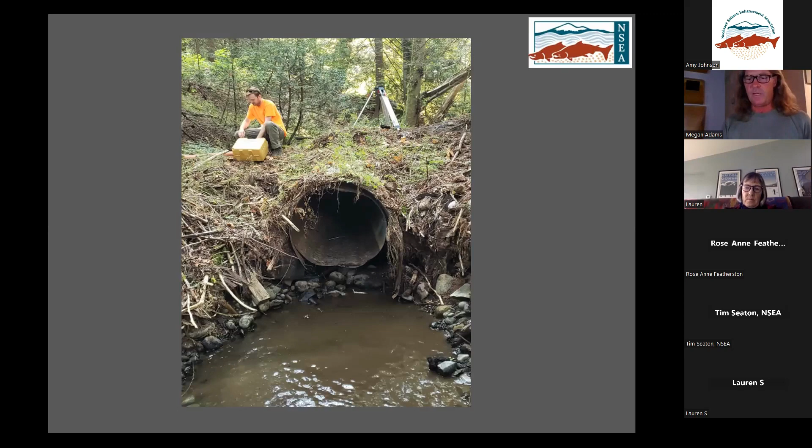There's other reasons; you might not have an outfall drop. You may have a culvert that's generally just too steep. The water moves too quickly for fish to migrate. But this is probably a very typical scenario. So I thought I would start with that before I get into what changed in 2003. So I should back it up.

It happened before 2003. So prior to 2003, the county kept a list of primarily culverts that they needed to maintain, not really inventorying them as to whether they were fish passage barriers or not. Department of Transportation, state highways, they were keeping their own inventory. Maybe the city of Bellingham had a list, but there wasn't really one conclusive list, and not everybody was measuring things the same way. So in 2003, the county applied for funding to do an inventory of all of Whatcom County, or Water Resource Inventory Area 1.

And we partnered with the county and the Nooksack tribe, and we were tasked with inventorying all barriers on private property, where we were allowed access. So as I just mentioned, everybody's got culverts, not all of them are barriers, but at that point in time, really nobody knew which culvert was a barrier and who owned it.

So Whatcom County arranged with the Department of Fish and Wildlife to come up and teach us a protocol, which is kind of the universal protocol they use. That's a level A survey. And what you do is essentially, just like in that past picture, you're going to take elevations of that pool drop, or you're going to take elevations of the slope of a culvert. You're going to look at the upstream habitat and the downstream habitat that's available for fish if they were to get past that barrier. And then you can generate this priority index number, and I'll get into that a little bit more. And that's what allows you to kind of look at apples to apples.

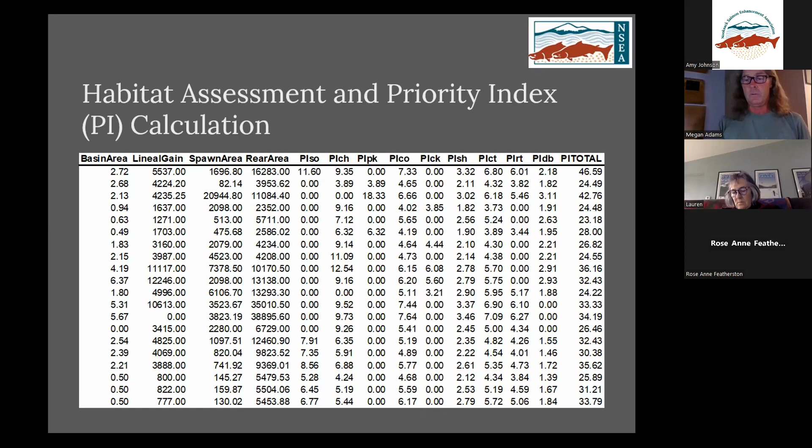What that allows you to do is, if the barrier was in Eastern Washington or if it was in Forks, you would have a number that would rank that against all other barriers. So it gives you a great way to prioritize what projects you should tackle first.

But this was my most favorite thing, and probably my first introduction to GIS. All of the data we collected was spatially recognized, so it knows where you are when you're doing this survey. And so it was all plotted on a map. And so in this case, you could see all of the culverts and you could see all of the barriers in a creek. And then you could say, okay, well, if we address this one and then the county addresses that road and the DOT addresses the highway, you could eliminate all the barriers in an entire watershed. So to me, this was the most powerful tool that came out of that.

And I'm not patting our backs, again, it was the county that did this, but this was kind of the first database of its kind at that time. And since then, there's all kinds of incredible data, specifically SalmonScape, which is managed by the Department of Fish and Wildlife, where you can look at every barrier in the entire state.

So these were the number of crossings that we assessed. And there's a little more than 800 that were barriers, and some of those are complete barriers, like no fish get up them at any time. Other ones were just partial barriers, so maybe in particularly strong winter flows, the culvert has a bit of slope, fish can't migrate through it, or in low summer flows, fish can't migrate downstream through the pipe.

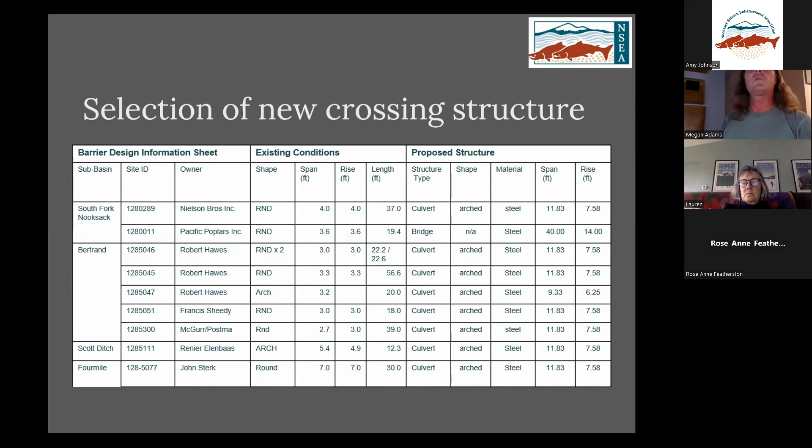And so I think with that funding, we were able to create plans for the top 15 projects that we wanted. And so then again, we went back into a database and we looked at what is the problem, what would be the best appropriate fix. At that point, we were just like, well, culverts are cheaper. We should just replace smaller culverts with bigger culverts. And after some practice, we learned that that's not always the case.

So you've got these designs, you've got this database telling you where the barriers are, and now you've got to go look for money. And very fortunately, there were a couple of programs that came into existence right after this. And one was the Family Forest Fish Passage Program. And that is aimed at forest landowners who have inherited barriers. So if you're a large forest landowner like Sierra Pacific, you have a road maintenance and abandonment plan that you have to have in order to log or remove timber, meaning that you are going to build all your crossings in accordance with WDFW specs. And then when you're done, you're going to pull those crossings and move back out.

But let's say somebody subdivided a piece off of a forest parcel and somebody built a house on it, and then you buy that house, but there's all these abandoned forest roads up in the forest land behind your house. The reason that this was legislated was that you shouldn't be burdened with the removal of that because you never installed those pipes. So if you have forest land, that program is wonderful.

There were a couple other smaller programs, Landowner Incentive Program. It's no longer in existence. U.S. Fish and Wildlife Partners for Fish and Wildlife. That program's also not in existence anymore, but there were programs you could apply to. They're competitive, but it was particularly fruitful if you had this PI number and you had a design, even if it wasn't 100% design, like you were ready to go, you were much more apt to get funding than to just go and say, well, we think we've got a barrier, we need you to give us some money.

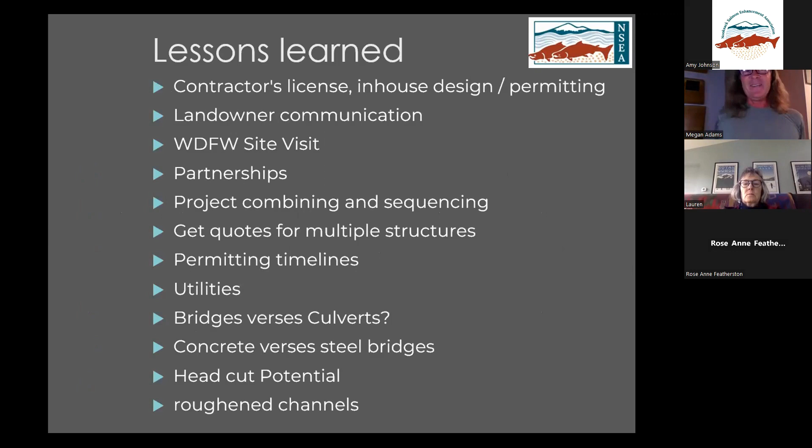Lessons learned. I won't go into all of these because I'm going to cover some of them in future slides. But yeah, you learn some things, especially if you haven't done many in-stream fish passage projects before. And as you learn, you learn shortcuts, or you meet more people that can help you out. You get good relationships with good contractors who are really efficient.

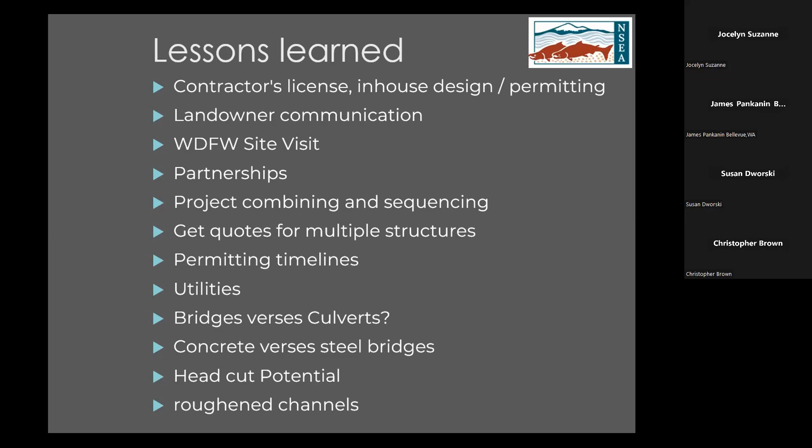But I'll just touch on a few things that we learned. As I mentioned, we had this old total station, and for those of you that don't know, ours is kind of antiquated, but it's a piece of survey equipment which, once you program it, knows where it is in space in 3 dimensions. And then you can just use that to take elevations and points, and then it will know where all those points are. And as I mentioned, then you can take it into a program like AutoCAD and create a site plan and get all of your elevations.

So we figured we already have this and most of us can run it. Why would we pay somebody else to survey it? So we started doing that. We found some students who had taken AutoCAD. I studied AutoCAD for a while. I'm terrible at it. I can do a little bit of quality control in AutoCAD, but I can't draw. So we found people that weren't engineers, but could draft plans. We found a few retired soil engineers who would help us out with foundation designs. We worked with a number of hydraulic engineers in Whatcom County who've helped us.

If you build a crossing that provides access or emergency vehicle access, it has to be fully engineered and has to come up to the fire marshal standards for fire truck crossing and any other vehicle that would cross it. So we can't stamp plans, but we were again working with some very generous engineers who could stamp plans for us, create reports, come back and do an as-built plan, which we need to submit again to the county or the fire marshal when we're completed.

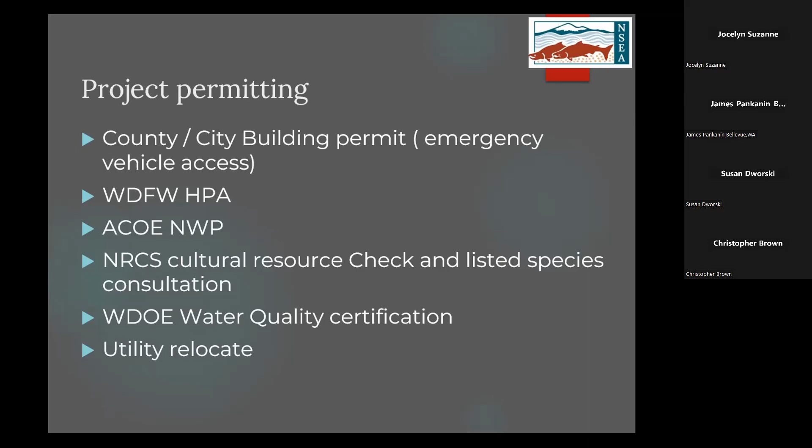So that's not one that we're necessarily worried about, but other things like utility relocates we never really dealt with. We dealt with some private wiring or plumbing over an old farm crossing. But then we came to find out, if you deal with PSE, you're dealing with a sole source contractor, Potelco. If you're not familiar with that, it takes a long time when they come out and move a power line. So there's just little things you learn.

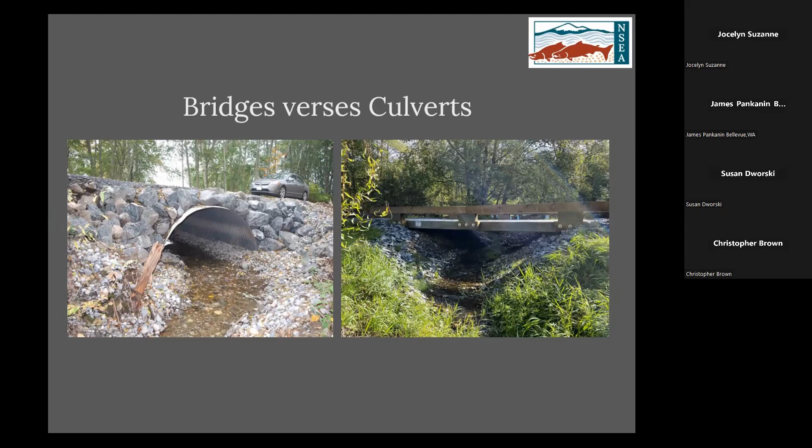I mentioned bridges versus culverts. I had also talked about replacing smaller culverts with bigger culverts and then embedding them into the channel. So the site on the left, that is a 12-foot culvert. It's bedded into the ground 6 feet. And so when you install that culvert, you have to dig a very big hole. The culvert's strength is in its bedding, which means you're going to compress gravel in 8-inch lifts along the side of it, all the way up, to maintain the integrity of that oval. This isn't an oval, this is a circular pipe. Even more so if you have a squashed or oval pipe.

Once you do all that, then you've got to fill the pipe half back in, and with a 12-foot pipe you can run a small skid steer into it. Anything smaller than that, you're kind of doing it by hand. Then, as you also notice, there's a lot of armoring around the edge of the pipe to support the roadway and stop the water from wanting to get around it. If you have utilities in that roadway, you're going to need at least 2 feet of fill. So we found that by the time we installed that 12-foot pipe and all the associated fill and gravel, it was cheaper just to do the bridge.

And the bridge on the right is a 30-foot bridge. I mean, you literally have just removed the culvert, regraded your channel, dug your foundation, and dropped your bridge on top. I mentioned that the reason for embedding that pipe is to allow for changes.

And you can allow for quite a few changes, but you can't really allow for a large tree falling down and fixing itself perpendicular to the pipe, and then a bunch of other stuff piling up behind that, and then the water decides to go around the road completely. So bridges give you a lot more flexibility.

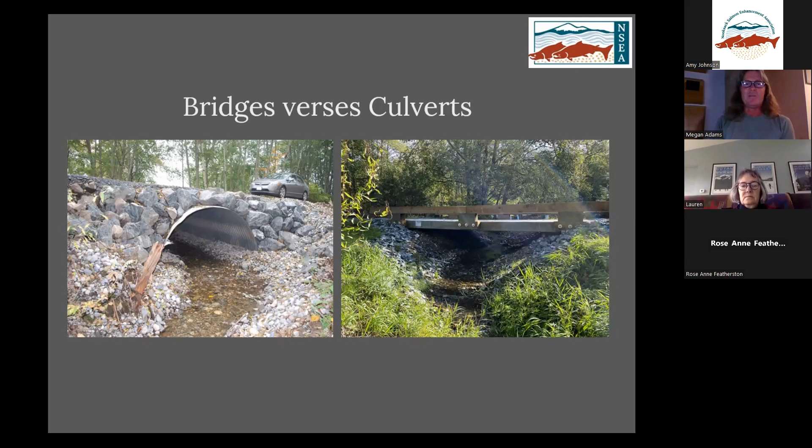When we design our bridge projects, there is a certain amount of clearance so that wood should be able to move. I mean, obviously a huge tree might not get under that bridge, but in that case, in this size of creek, that tree would probably not move. So we kind of came to the realization that bridges were better. Well, they're better for maintenance, and they're cheaper, and they're easier in the long run.

So I mentioned clearance. So one thing that a hydraulic engineer does for us when we hire them to do a project is they look at the basin area above the culvert. They look at the hydrology, so how much rain is going to fall in that basin. And then they can use a model to generate certain storm events, or what you would call a 100-year event. A lot of rain, or rain on snow. What would the water surface elevation be at your cross section under your bridge?

And the Department of Fish and Wildlife, they used to require 1 foot, 2 feet. Now I think they're at 3 feet. The funding agency I mentioned, the Natural Resource Conservation Service, they require a minimum of 2 feet. So you have to run this model and then raise your bridge to make sure you have that clearance. And again, that's allowing large trees or wood to move under the bridge.

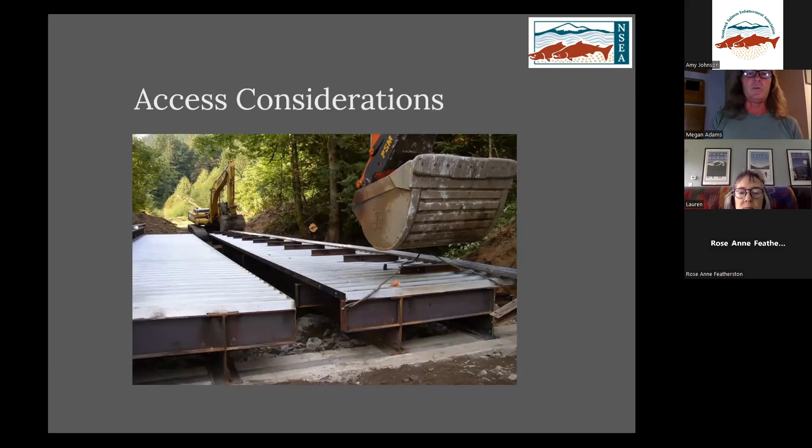I just wanted to give you an example. I was talking a little bit about grade and grade control. One thing we did learn early on, if you were going to do more than one culvert in a reach, and this I think we did 5 over a period of 2 years. If you just adjust for where your crossing is and try and anticipate where the gradient would have been, but you're not really accounting for everything that's upstream, and it'll become apparent when I show you a picture of the plans, is how in that little culvert picture I showed you initially, it's scouring at the bottom.

But at the back, it's aggrading. Gravel is piling up because it cannot get through the pipe. So you would get this kind of step through the prism of the culvert. So if you just adjust for your step, but then you go upstream a little bit, there's another culvert that's doing that or worse, then that has changed the gradient for your culvert. And then you go upstream and it's changed the gradient again. So if you do not take all of that into effect, you might put it in and think, oh, it's all fine, and then it becomes a barrier.

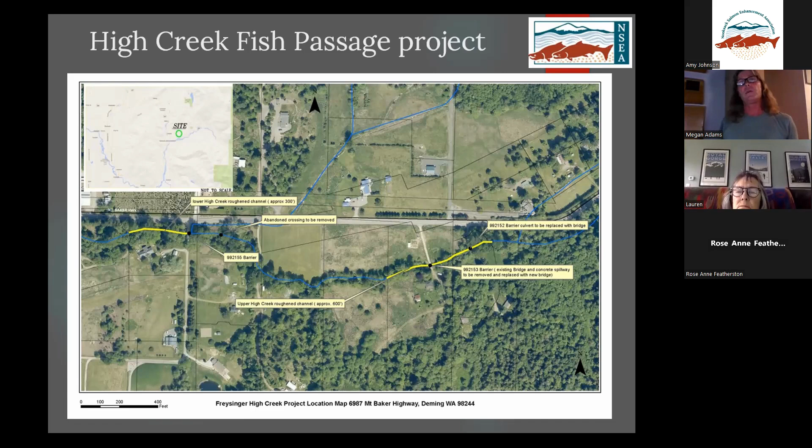So I think I've got a few plan sets in here. So this gets a little more complicated because you want the creek to adjust naturally, but you can't have it adjust all at once. So you end up putting a lot of grade control. You shoot your elevation instead of the 150 feet on either side of the pipe. Maybe you shoot it 2,000 or 3,000 feet through all of the pipes. And then you get to what you think would be an appropriate profile for that creek. It's not perfect, but as close as you can get.

But then while things are adjusting, you have to hold that gradient. So in this, I'm not seeing it so clear with my glasses, but you can see the first barrier, I guess would be to the right. You can see the big drop, and then there's another drop, and then there's another drop. So you're trying to take into account all of those drops.

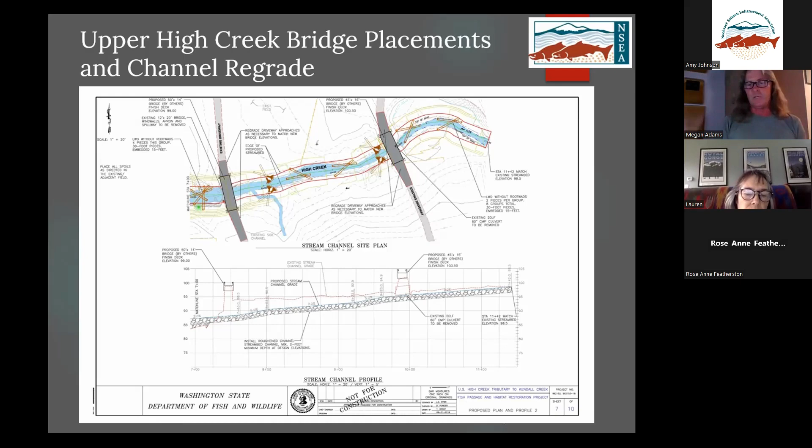So this is a picture of that same site. So this is the second most upstream. There's 5 in a row. This had the biggest drop, probably about an 8-foot drop. So again, to do the one upstream of this, we had to know if you took this drop away, where would the creek end up?

So that's where we're kind of shooting these longer profiles. And in this case, we're using some bigger cobble, we're using some wood, try and slow water down and just let it find its new gradient.

Some things you can't anticipate. So there's a 70-foot bridge we put on Hardscrabble Creek, a tributary to the South Fork. We finished the project in early October. In November, there was a rain on snow event, and they had a debris flow, and that wood all piled up against the bridge in one event. And fortunately, it only pushed the bridge about 6 feet off its foundation.

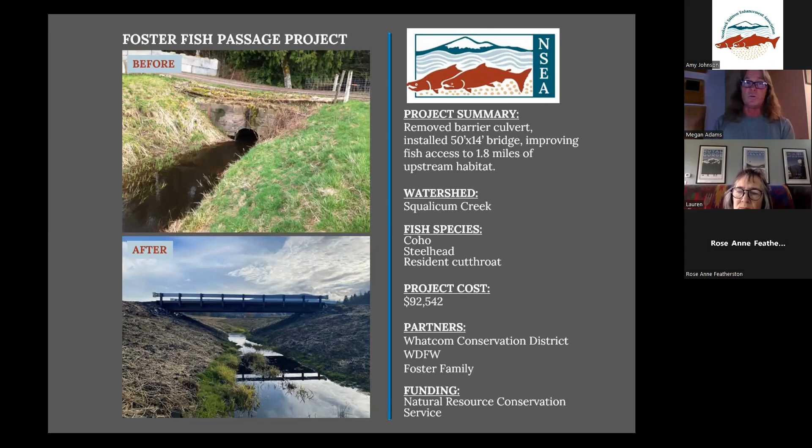Super nice guy. And we said, well, you've got a bunch of failing banks. If we come up and do the bridge, could we put the banks back together and plant the entire 2,250 feet? And he said, sure. It's not the biggest buffer in the world, but it's huge. So we're really excited about that. So yeah, the crew's been planting that all winter.

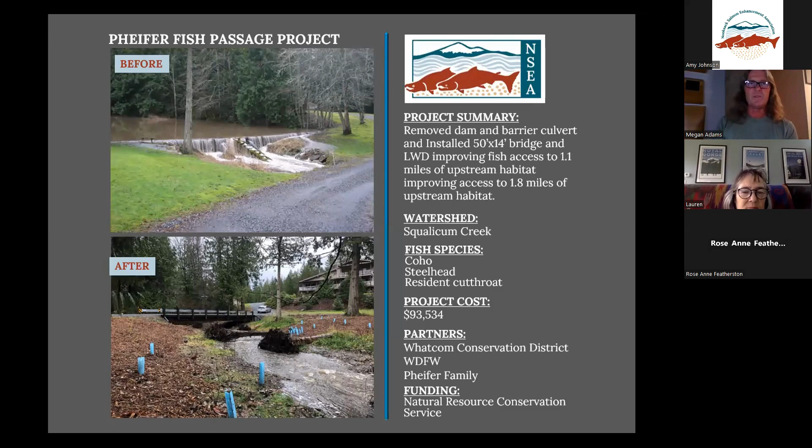We do remove dams, and they're the funnest projects. I think we've only removed about 4. So this was an old concrete dam, was keeping water ponded for agriculture, and just had slowly filled in. Great landowners. They tried to build this little ladder out of extruded aluminum, but it wasn't really working. Yeah, it was a very fun project.

So I mentioned there's still a few out there. So this is on High Creek. I've been talking to this landowner for over 10 years. He's not really interested. He's not mean or anything. He's just not really interested. He likes that little waterfall. But I'm hoping one day. Well, the one that you saw that had the 12-foot drop, I had talked to that person for over 10 years before they let us do it. So you just keep coming back and being persistent.

And the reason I put this slide in here is because they talk about lessons learned. I think persistence is probably the best lesson. Like, don't be deterred. Just keep going back and asking. They'll only say no.

And there is a person at the conservation district named Frank Corey, who was actually a WCC supervisor with us in the mid-late 90s. And he works for the conservation district. He runs that Environmental Quality Incentive Program, and he perseveres. I mean, he helps me find funding for all kinds of stuff I think I would never get funded. You know, he just says, well, we'll just keep trying. So it is just wonderful to have him as a partner. And that is it, I think.

So definitely welcome to ask some questions. And if I went too fast, I could probably even go backwards and find a slide if you had a question about something. Yes. So how much do the bridges cost?

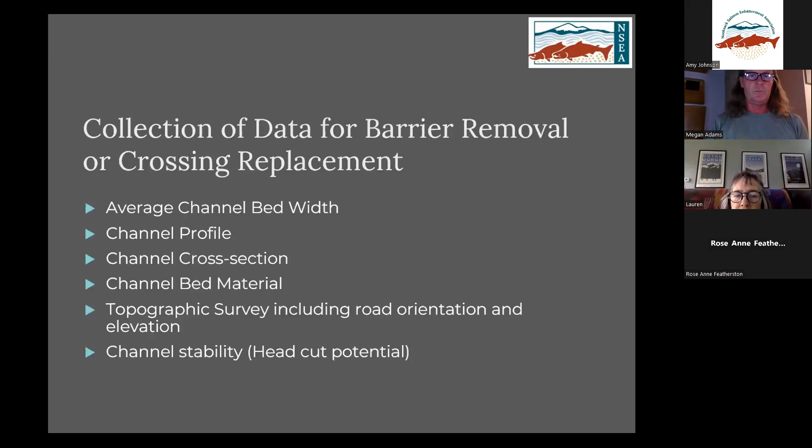So I think they're both 40 feet. And I think this year we go out and we get 3 quotes for each bridge. And I would want to say the concrete's a little less. It's probably about 42,000. The steel one's probably closer to 48,000. Like I say, it's fully engineered. So it's not cheap.

And fortunately, again, there's been some great funding programs. If you have a barrier, there is probably a program that would pay to fix it at no cost to yourself. A little bit of inconvenience, but most of these projects take 3 or 4 days. And if there is a power need, we'll put in generators, keep people's houses, fridges cold, and washer and dryers running.

So I don't know if that gives you an idea. So by the time that was installed, and this has been an older bridge, it's probably closer to like 2005 or 2010, all in, we were probably about 60 grand. Today, probably be closer to 80 grand. Because again, if you haven't noticed, there's 2 big gravel companies, and there used to be 6. It's a bit of a monopoly, and rock has gone up accordingly with everything else, trucking, fuel.

Any other questions? Yes. In most cases, are the bridges 2-lane bridges or...? Yeah, so the county fire marshal sets a requirement for width. It used to be 1 to 2 residences, you were okay with 12 feet, but I think they just recently changed that. So I think one residence, you're 12 feet. I think 2 to 3, you're now 16 feet. I might have jumped, might have been 14, then 16. When you have more than 5 residences, it's a 2-lane road, so it's a 20-foot bridge. So it gets pretty expensive pretty fast when you have multiple residences.

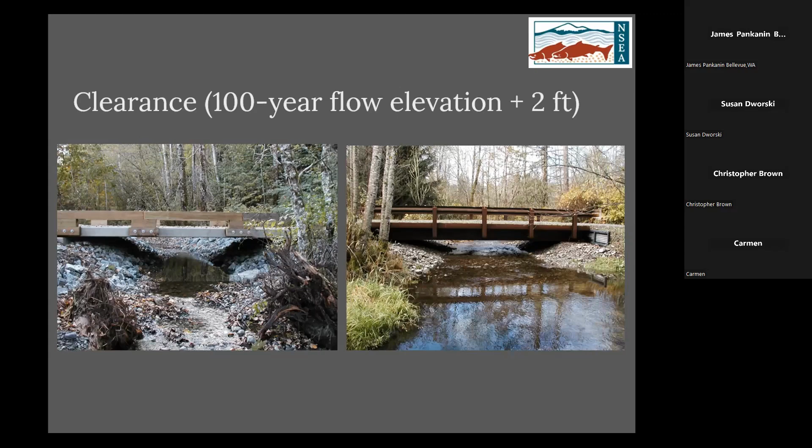And I think DOT would have come to that realization eventually. But the moment the court injunction came out, they have to fix it. So where I was going with that is fish were getting up there, it was just very hard. So we felt DOT is going to do this eventually. They're going to have to. And we're going to go ahead and start doing these upstream. It was originally on the plan for 2021, then 2022, now 2023. Sounds like you're familiar with that. So when we saw it coming up, we're like, okay, we're going to go do these last few upstream that were closer to the lake.

So there was a court injunction against Washington? Yes, and then all state, pardon? All barriers? Oh, okay. DOT roads in the state. It's a heavy lift. I mean, they think the court injunction gave them 30 years, there's no way, but they're making better progress than I thought, because that's a big bureaucracy, pretty slow moving machine, and they're doing all kinds of projects.

And whether you say, well, you look at, should be careful what I say. Nobody lives on Padden Creek. I mean, the amount of money that must have cost to get that through there, and fish can only get so far, and then there's a dam at the lakes. That's a lot of money. I don't know if I'm going to spend it there, but they don't have any choice. They have to.

You guys ever run into the situation where you create the passage and it interferes downstream with somebody, because it backed up somewhere higher, and all of a sudden it's become their problem? We have not. I mean, as I get older, my memory's not that great. I may have had a couple of people that have called and said, can you come look at this? You just released all this water. I don't remember anything that we couldn't solve by doing something in addition to our site, and we're never restricted like DOT is to work in our own right of way. We'll work on anybody's property. I can't say that there's been anyone that's just been literally angry and we're going to take you to court.